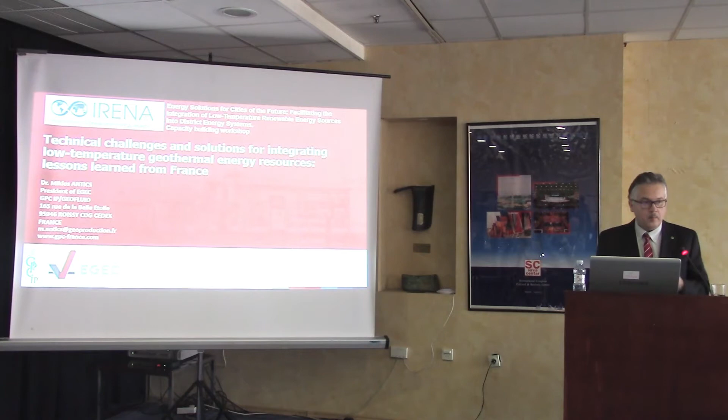Well, in the initial topic, it was announced that I will speak about the Pannonian Basin, because it happens that my grandfather emigrated from Serbia 100 years ago into Western Romania, but I don't speak a word of Serbian, which I excuse for. And I am trained in the petroleum engineering domain in the Ploiești school in Romania. However, my mother language is Hungarian. So this is all about me and my company.

Well, as an EGEC president, I felt the obligation, apart from the main topic, to present you a bit of the market report, which is our main document analyzing the evolution of the development of geothermal energy in Europe and also the tendencies in the industry, which is not completely disconnected from the topic I'm going to tell you about, the Paris Basin geothermal system. I will concentrate on heating.

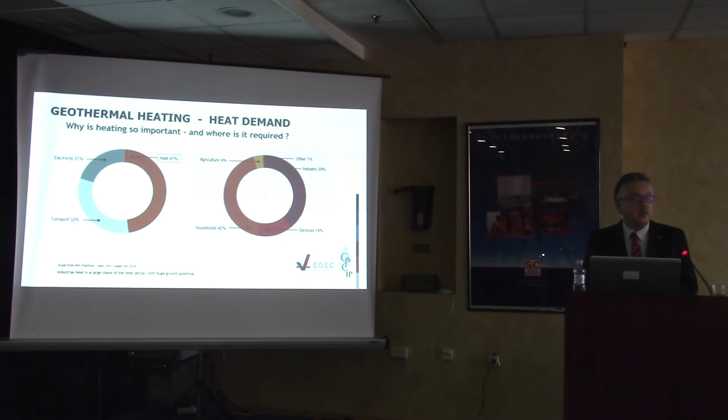Why is heating so important? Because in all our life, heat represents 47% of the energy use, and this heat is used 42% in households and 39% in industry. So it's quite an amount of energy which we use as heat. We are always coming into our house. Most of the time it's comfortable, it's hot, and it's normal for us to have a heated and comfortable environment. But where this heat comes from is not always evident.

Geothermal energy is the unique natural renewable resource which can satisfy all sorts of uses, from shallow geothermal energy with heat pumps. It can provide district heating and cooling with all sorts of resources from aquifers, and can produce cogeneration from EGS, enhanced or engineered geothermal systems, and of course it can be used for underground thermal energy storage with piles or aquifers.

And last but not least, geothermal energy is widely used in the greenhouse industry, and greenhouse operators in the Netherlands, which is one of the largest producers in Europe, have mostly been in the tendency of converting their heating system to geothermal.

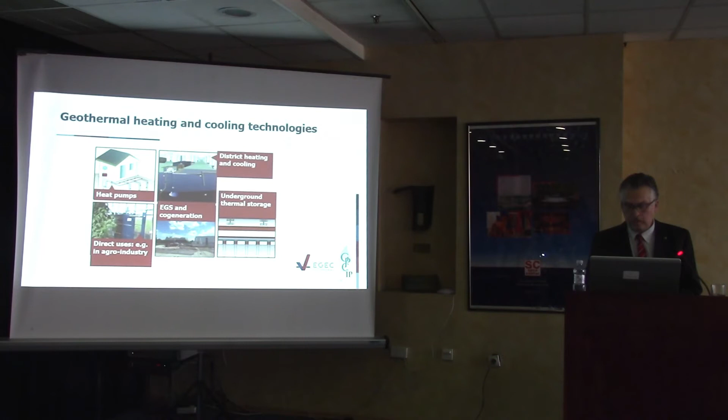Well, where we are now, we have reached in 2018 more than 3 gigawatts electric installed for geothermal and more than 300 geothermal district heating operations. And we should not forget that we have more than 2 million geothermal heat pumps in operation. Geothermal district heating has 5.1 gigawatts thermal capacity.

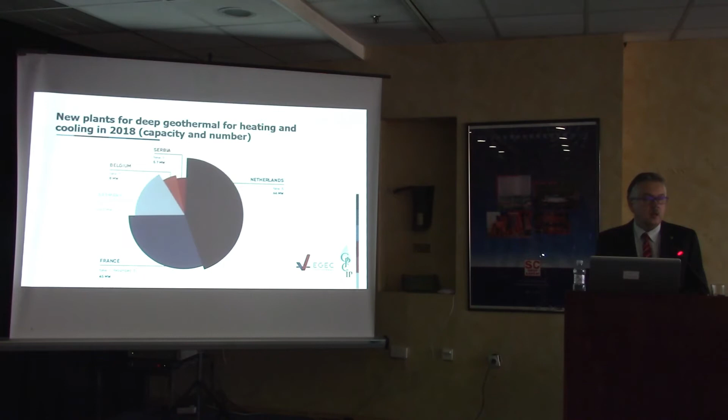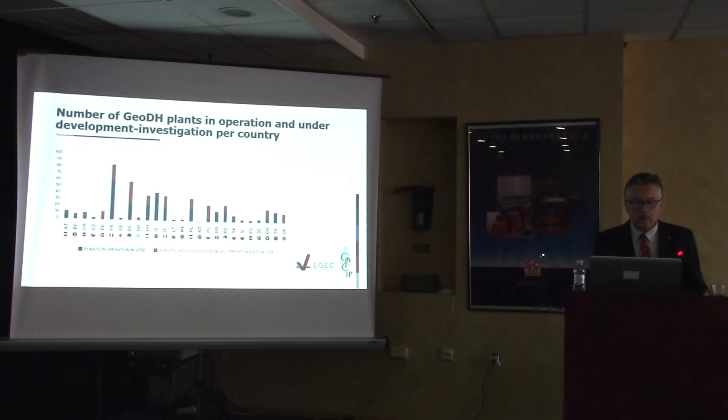Germany is picking up, because you may have heard that the Bavarian government and Munich have the ambition of decarbonizing and converting the city of Munich entirely to geothermal by 2040. Well, these are the leading countries by number of geothermal district heating plants in operation, under development and investigation. We can see that France is the leading country, followed by Iceland, Turkey and the Netherlands.

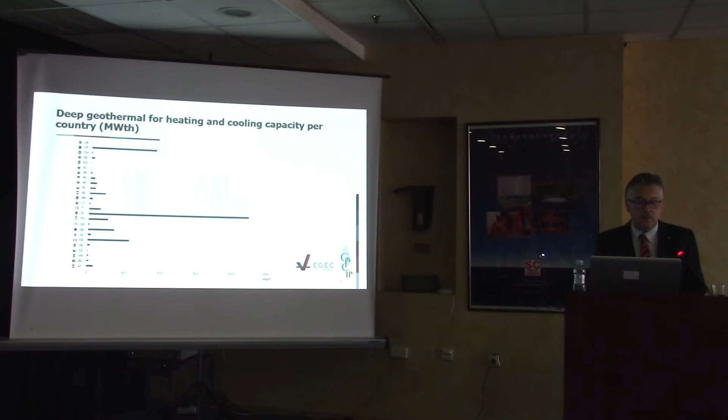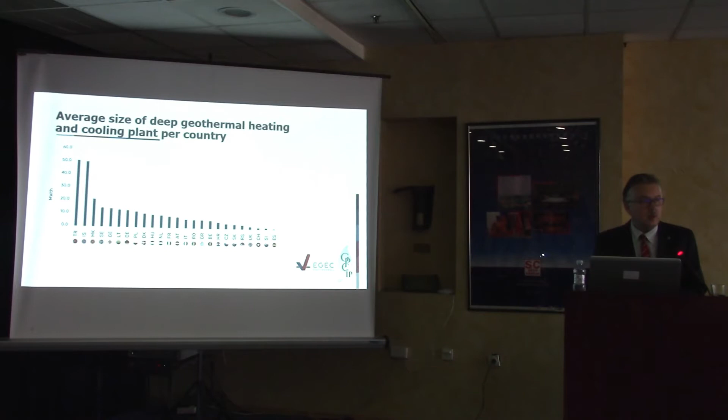Well, geothermal, let's say, capacity-wise, Iceland is the lead, followed by Turkey, as you see in the graph, and then by France. The average size of geothermal district heating systems: obviously the largest are in Turkey, at 50 megawatts, and in Iceland, and then the average we can see in the neighboring countries stands between 10 and 12 megawatts. Of course, as was said earlier today, there are small communities eligible for geothermal district heating, which are eligible for smaller plants as well.

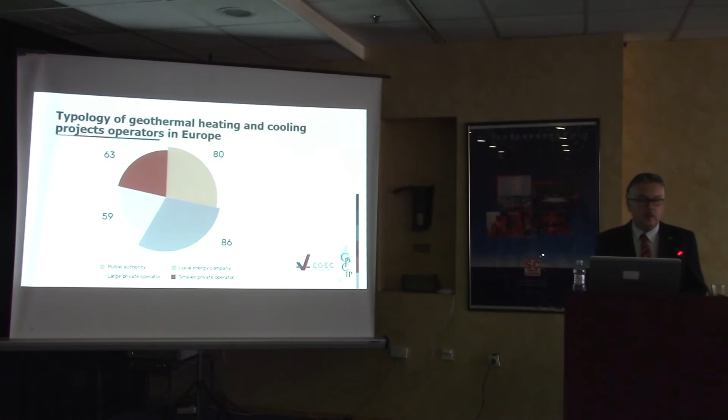Obviously, as I told you, the biggest plant capacity is in Germany, followed by Iceland, and curiously, Eastern Europe with Croatia follows, and then France still keeps on. What are the types of operators in geothermal? Out of the 300 plants, you can see that there are essentially public authorities, and then local energy companies. So what does this tell us? It tells us that geothermal energy is driven essentially by local wish and by the local community. And of course we have private operators, but these private operators more often are fulfilling contracts like delegation of the public service.

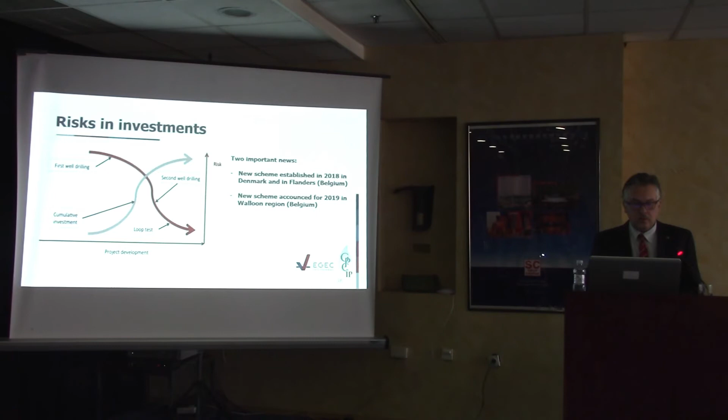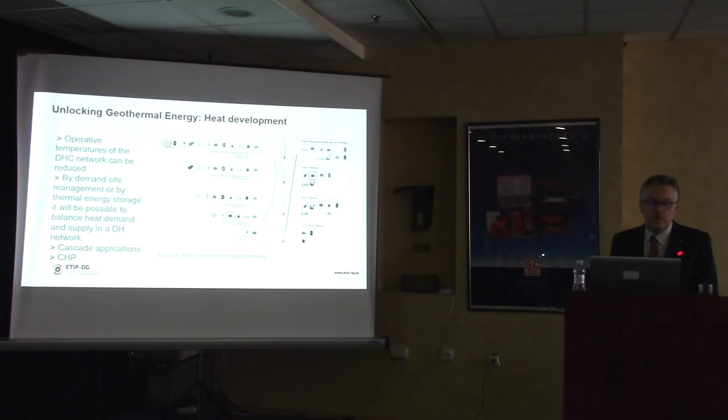Well, again, how do we unlock geothermal energy? This is the vision of the European Technological Innovation Platform of Deep Geothermal. Essentially, what we are going to have is 4th-generation district heating grids with smart grids and with multi-energy grids, which you have heard already in previous talks today and yesterday.

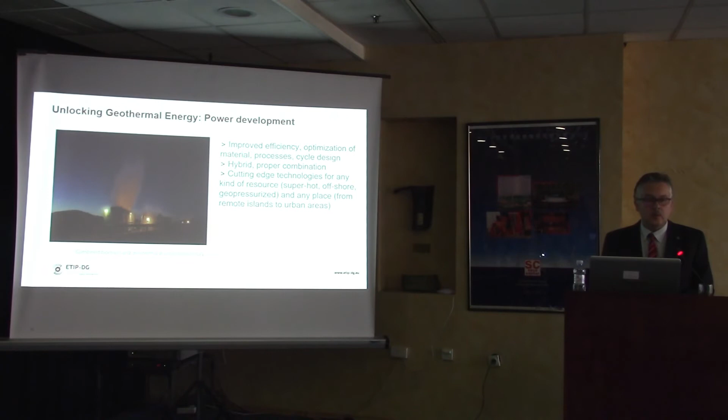Well, this is what is needed for power generation. I'm not going to insist on that, but power generation and combined heat and power are related together because they provide a more efficient use of the geothermal resource. Well, this is again the combined production. This is integrating smart gridding and also multi-source, multi-energy systems, which are the future in our energy system and in our, I would say, decarbonized energy system.

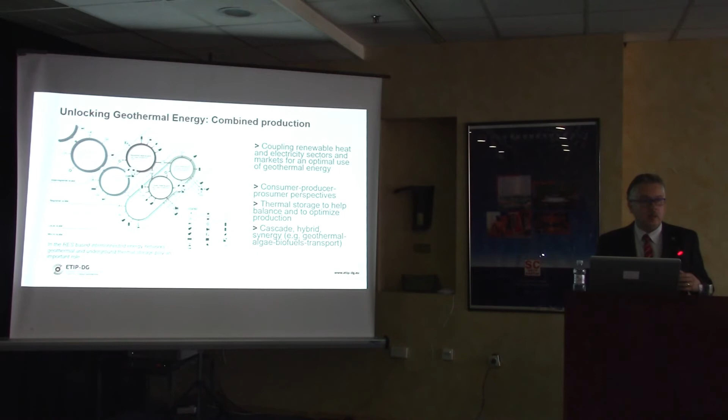Now I'm going to the main topic, talking to you about the Paris Basin. Well, the Paris Basin is not much different from the Pannonian Basin. It's a large intracratonic basin. It's a stable sedimentary basin with very few faults. And in the Paris area, we identify a series of aquifers, shallow aquifers, lower Cretaceous aquifers, the target, the Dogger reservoir aquifer, which essentially supplies most of the district heating systems.

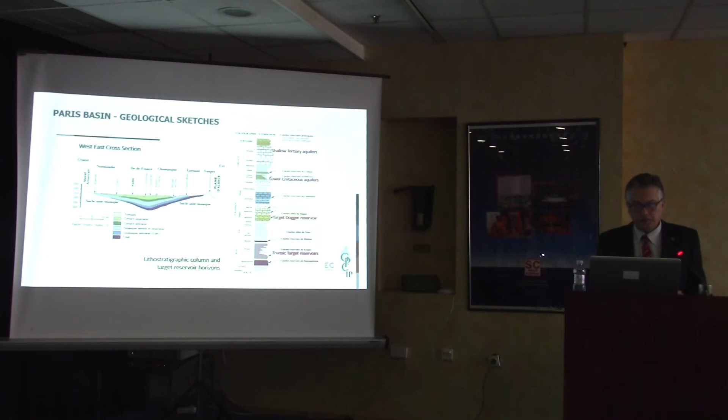And nonetheless, we had failures in the Paris area. Failures essentially because of thermochemical shortcomings, corrosion and scaling, which have led to the abandonment of certain doublets in a very short time and with a large debt to the people. Today, we have 49 doublets in operation. We are producing 1,100 gigawatt thermal hours per year. The average number of hours of operation on a doublet is 8,250 hours. And more than 1,100,000 people are benefiting from geothermal district heating in the area.

Well, downtown Paris, we do not have any systems so far, but we do have shallow systems; we ourselves have constructed some on Rue de Rivoli, where the Musée du Louvre is, and also in Rue Washington, which are emblematic avenues of the Paris area.

Well, fortunately we did that at the time when there were no Yellow Vest protests in Paris. Well, approaching geothermal energy, I always tell the audience that being a reservoir engineer is like being a prophet. You know, you have to find out how to squeeze water from the stone. But since Moses, nobody was so clever to do so.

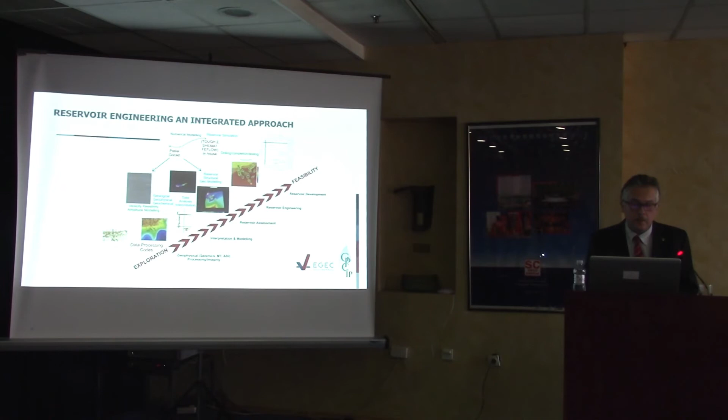So for that, you need a reservoir engineering approach, an integrated approach, which goes essentially from exploration to feasibility, and you have to go through all the steps from offset data processing, seismic data acquisition, modeling, essentially geomodeling, reservoir modeling, and then well architecture to design the most suitable production infrastructure with which you can produce your energy.

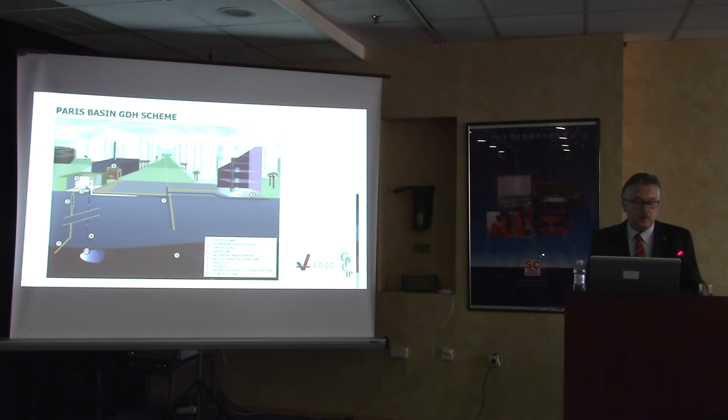A typical geothermal district heating system in France or in Paris consists of one doublet drilled from the same platform, 2 deviated wells which are supplying a heat plant, and the heat plant is supplying via a substation the buildings all around by a heating network. It's a very simple system, and all the geothermal systems except a few are operated with a deep electro-submersible pump, and they are benefiting from a reinjection pump later.

What is covered by geothermal energy? If you look at the load duration curve in the Paris area for a typical district heating doublet, we can see that the yearly renewable energy source coverage is 66%.